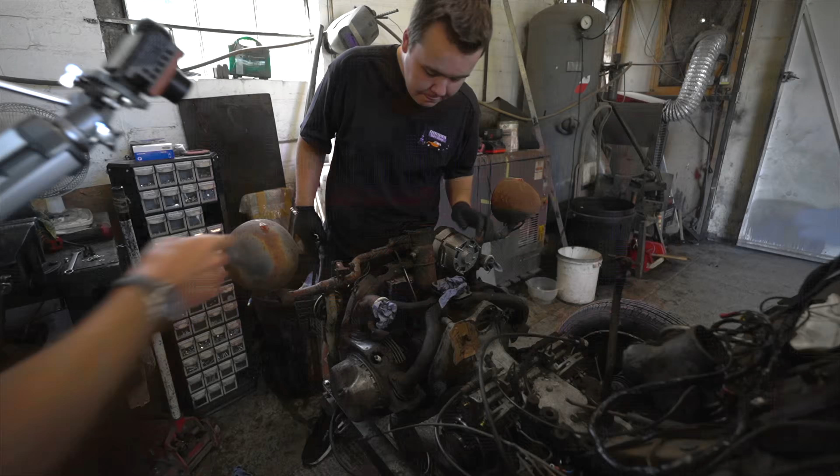No, I didn't realise how crucial the breather is on a 2CV. Apparently it's very, very crucial. So they often, you rebuild them? Yeah, what we do, you get a kit and basically we cut across this little seal here. It's like a clamp that holds the two pieces together.

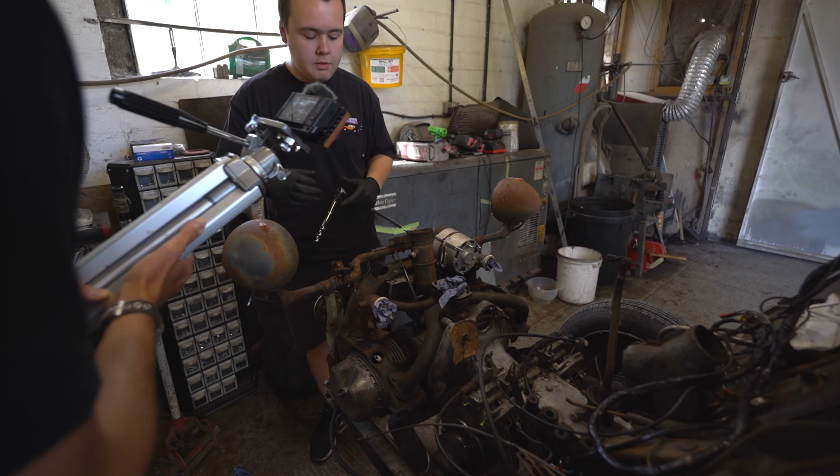Yeah. And inside there's a bunch of little rubber seals and a kind of one-way breather valve to let the pressure in the crankcase out and through this little hose, which then goes back through the airbox. Yeah. And I assume it gets reburned through the normal intake stream. But you have to cut it open, do you?

Yes, in the instructions it says you use this grinder and you cut away at this bit and then you cut around it and you pull and twist the two parts separately and then hopefully it should all come out fairly nice and see what the condition of it is like inside. He's rebuilding the 2CV oil breather.

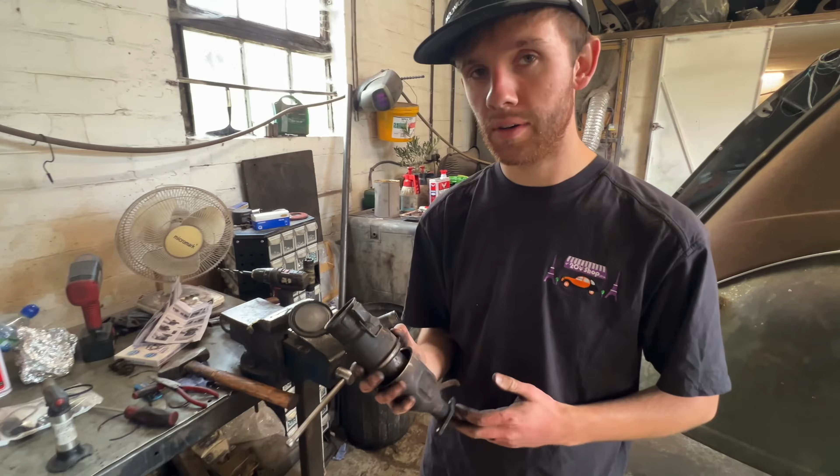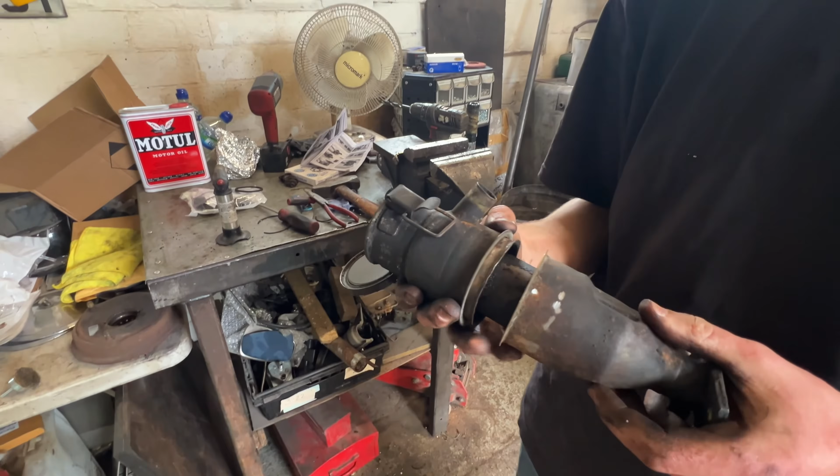So what have you been up to, Jen? Well, normally this has a lip on it that gets folded over the top, which holds it all together. But of course, you can't get them apart. So what you have to do is get a sander or an angle grinder, cut that lip off, and then that allows you to separate it all. And then strip it all down, take all these bits apart.

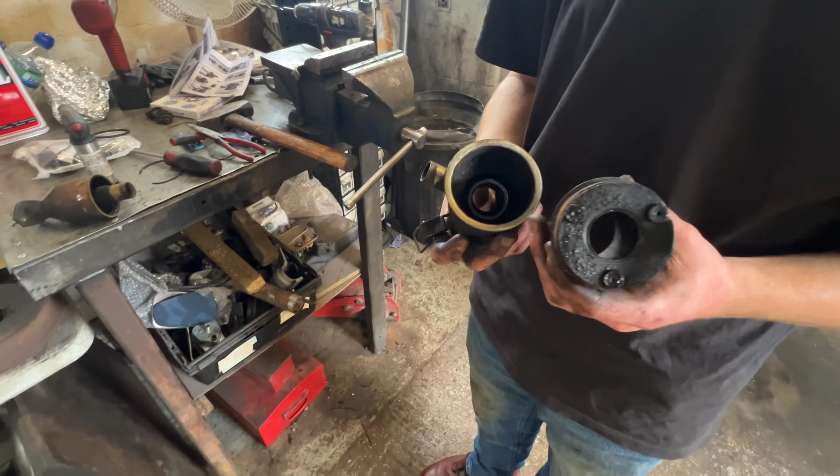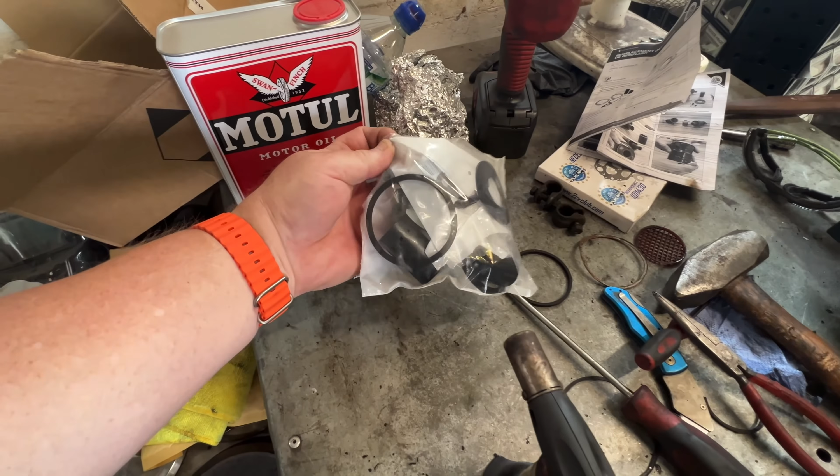And now we're ready to replace all the seals inside. Yep. And these are all the rubber kits to actually repair it so the engine will breathe.

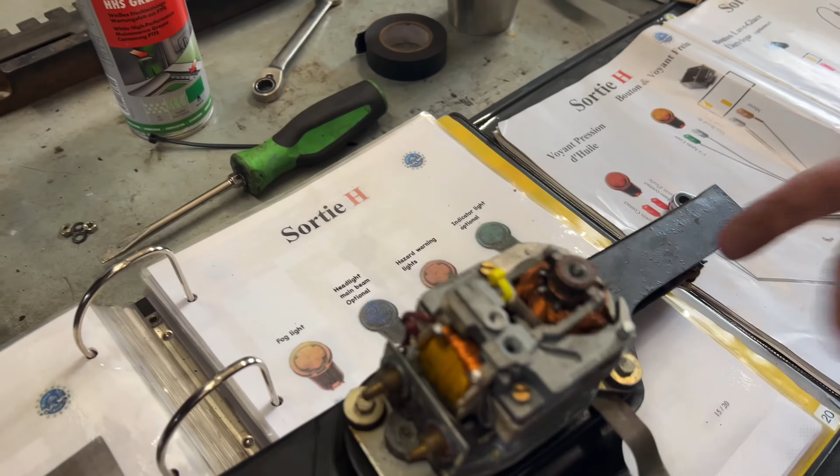So, Mr. Sattler, how are you getting on? That way. So cable tie on, and I've replicated the length of the original broken bit, so it's got the right tension. So absolutely perfect now. All fine. Perfection. Perfection in cable tie. I would only expect that from a maths teacher. So cover back on, done.

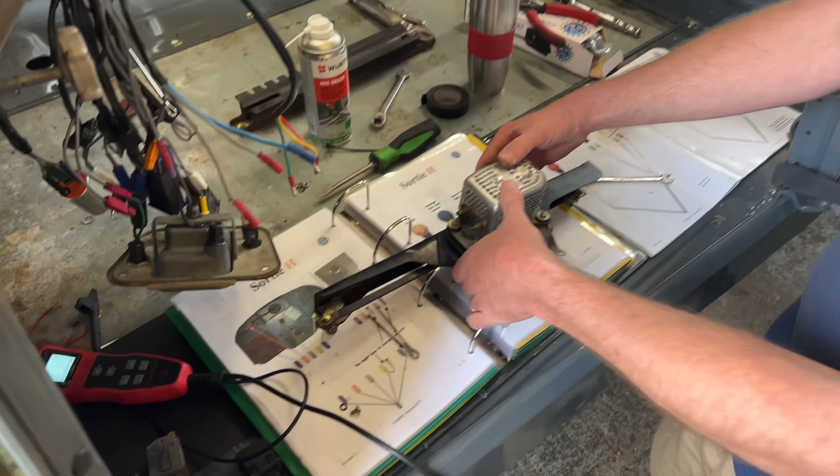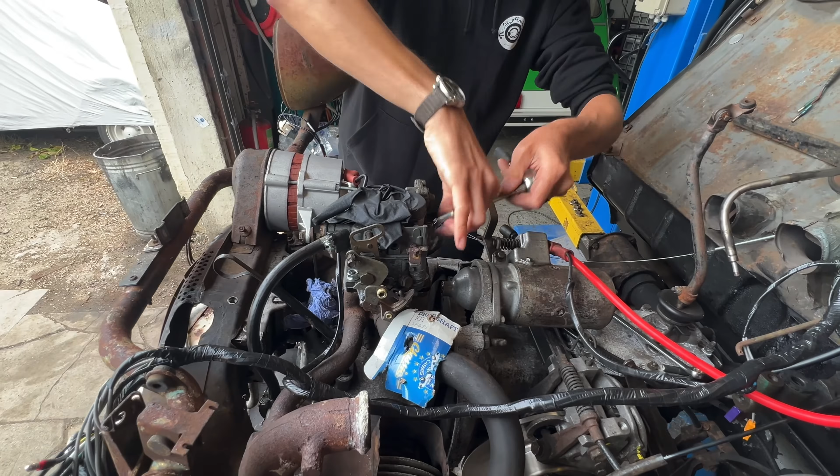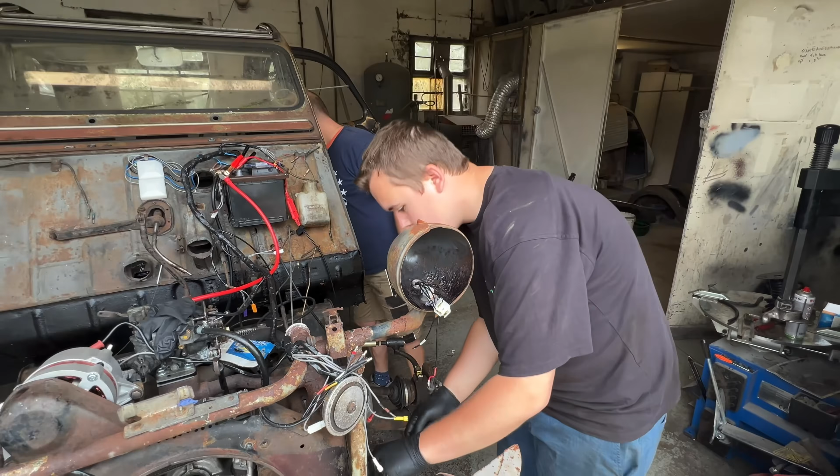So what's going on at the front? Jacob's doing a fuel pump. Mr. Smith is putting the bracket on for the accelerator cable. Yes. Yeah. Then we've got to put the coil on, electronic ignition, put headlights in. Richard's fixed a problem with the wiper motor.

That's going back in. So I think Mr. Smith's next job after doing that is putting the headlights in. So we get some lights. Yeah, refurbished headlights. Wire up these bad boys.

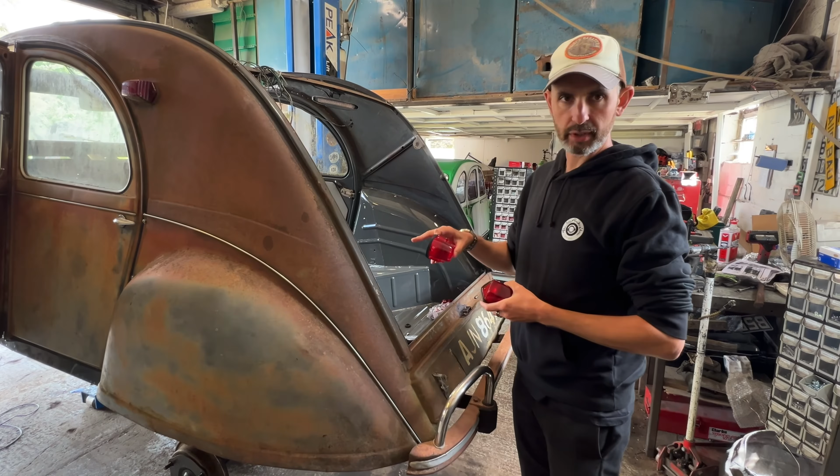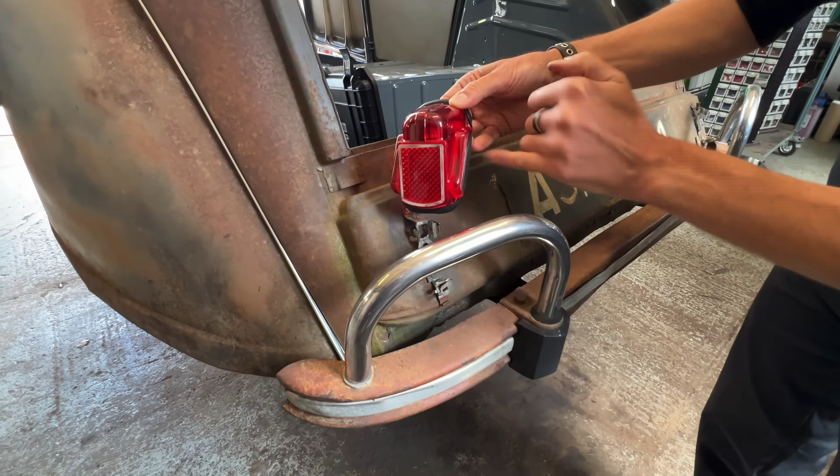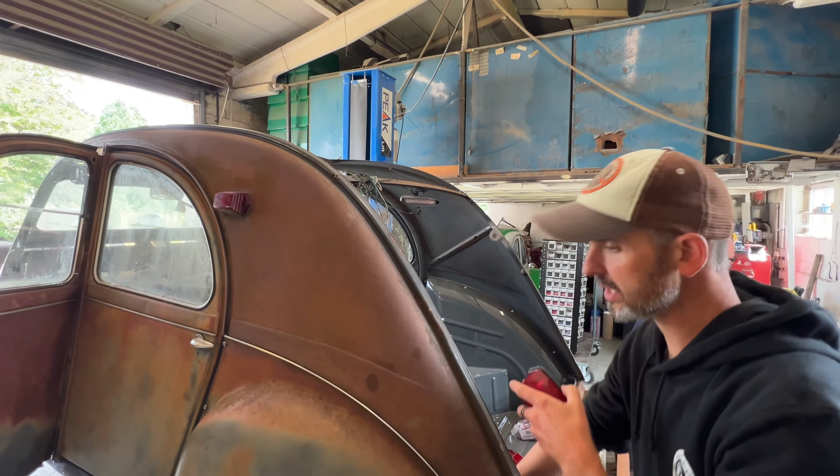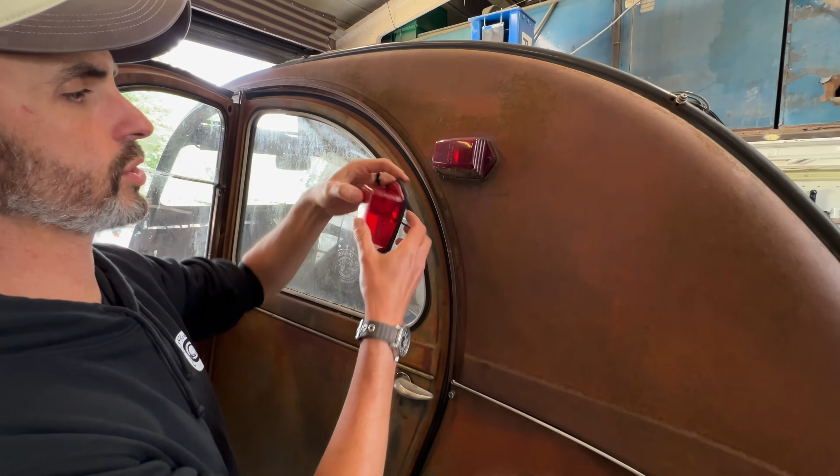So on this model of 2CV, you've got the quite small rear light clusters, but they are just rear lights. These are repro lenses, and the inside part that's clear acts as a number plate light shining in. So the indicators are up here, which is really cool. You can see this is one of the original units, but I think when I got the car, it was broken. It was missing the front portion. So Club Cassis do repros of these and of those taillights as well.

So I'm just going to take this off and have a look and see what the guts of this one are like. And I'll probably keep the other side, which isn't broken, as a spare. So we're going to have a look at that in case we keep the original guts or we go with the repro guts.

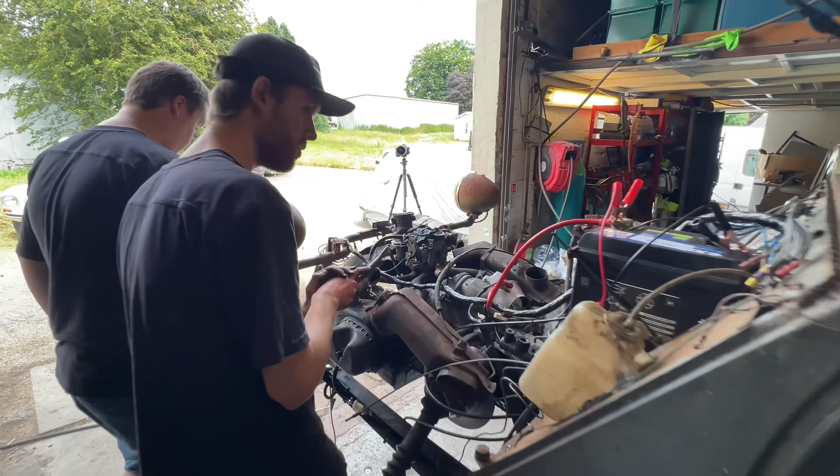Scrub them. Joe's on the exhaust. Yep, boom, boom. All the wiring looks a mess, but it's basically done for the front. We just do the wiring for the back.

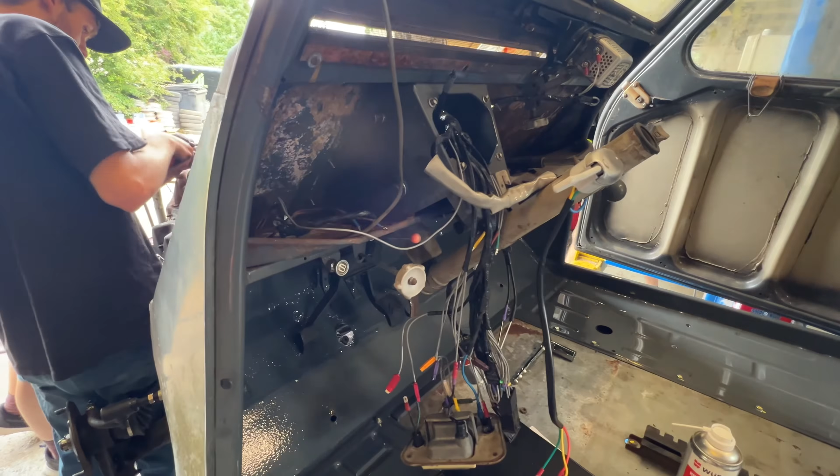Now the only downside to the indicators being up here is that modern motorists are not looking up here for indicators. So whereas we've added those extras on the front that someone had put the wiring in for at some point, we might put some aftermarket indicators down there somewhere. Some discreet little LEDs. This has also had a third brake light put on it. For that reason, people aren't expecting to see brake lights up here.

So actually, it doesn't look too bad. We'll pop it off and have a closer look. It doesn't look too bad, and I'll give it a clean up around there because obviously I'll get most of the loose algae and dried algae and stuff off like there.

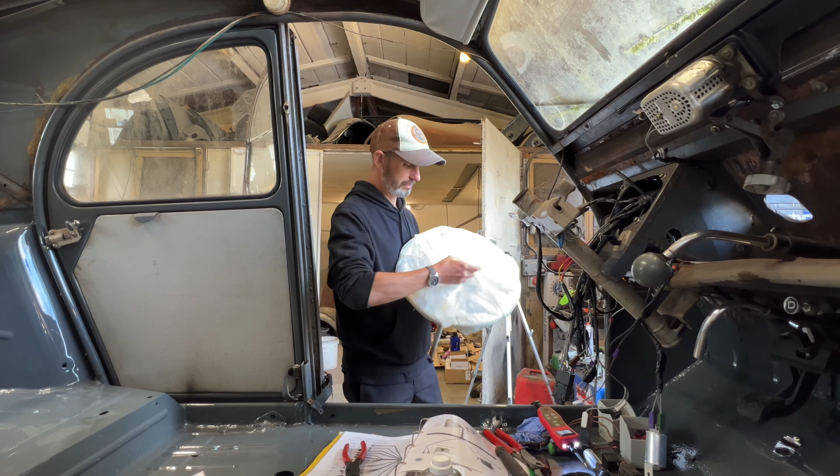It's actually time to put the steering wheel back on and reconnect the column. So we've been storing it very carefully because it's quite a rare wheel now. And I can't stand stuff getting damaged when it's off the car. I have the experience of that.

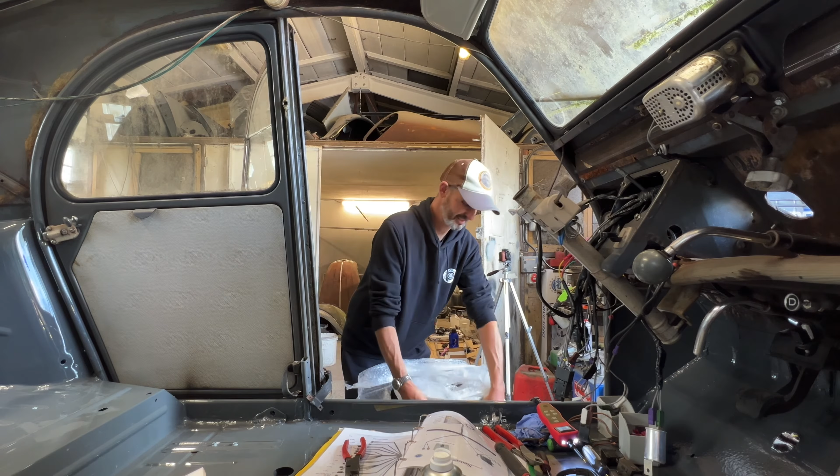So once we get that on, Jacob's done the tracking of the car, so the wheels are pretty much dead straight. So as long as we put the wheel on completely straight, it should be aligned. And then make sure the rubber is put in place there where the column goes through the floor, so you don't get water and mud coming in.

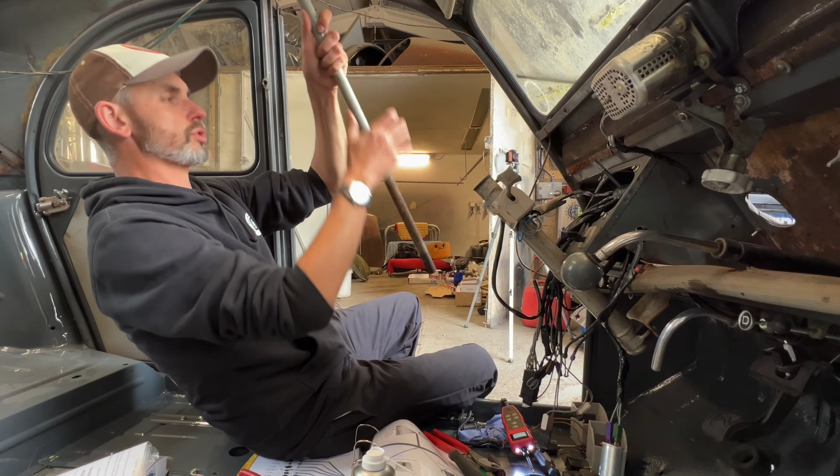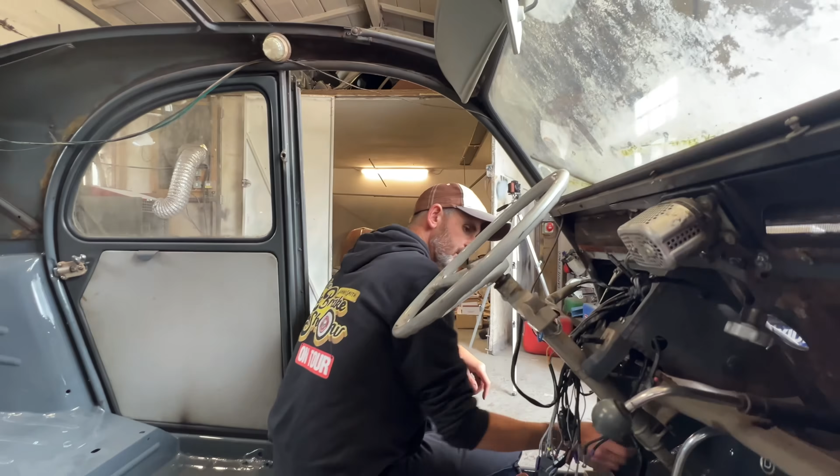Right, time to put the steering wheel in and make sure that the wheel is lined up. There's a rubber at the bottom where the column goes through the body onto the chassis. Pretty level from where I am. We'll get that grommet fitted properly once it's pinched up. So it's got like a clamp, like a pinch bolt, isn't it? Yeah.

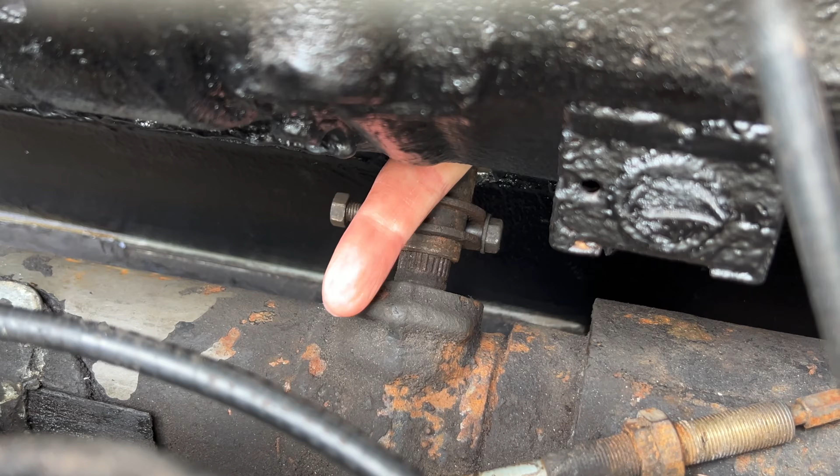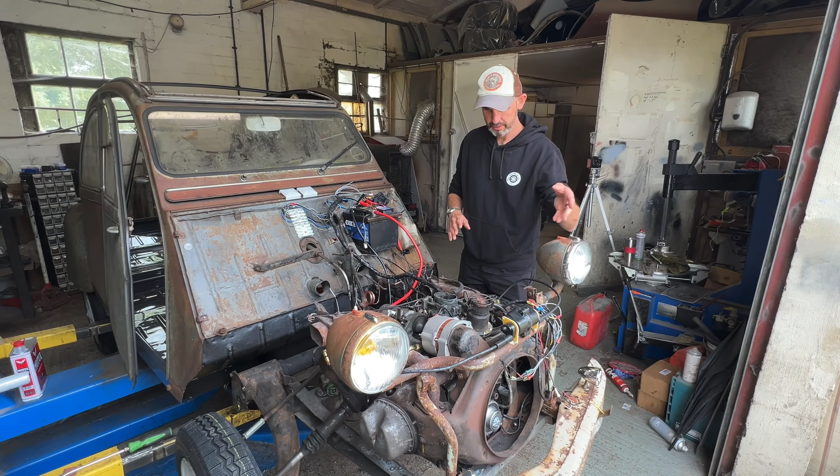You bloody muppet. So we think it's ready to fire up. Just a preliminary fire up. Air cleaner's not on it, fan belt's not on it, and the fan's not on it. But just to start it and check, we've primed the fuel system, put new petrol in it, ignition's on. Exhaust is on. So the ignition is on, the key is turned here. When I pull that back, there's no cables attached, and the throttle's not attached. I've got to do it manually.

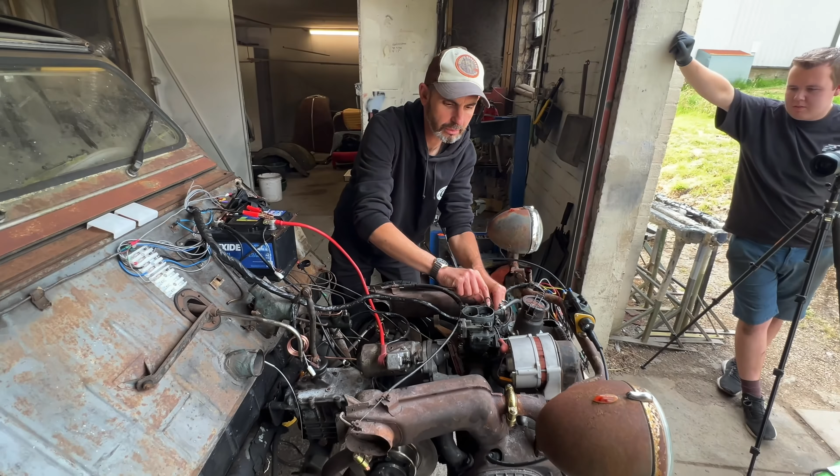I think it will go. He says. Just double check. Everyone ready? Yeah. Sounds alright, doesn't it? Yeah. Give it up. That's perfect.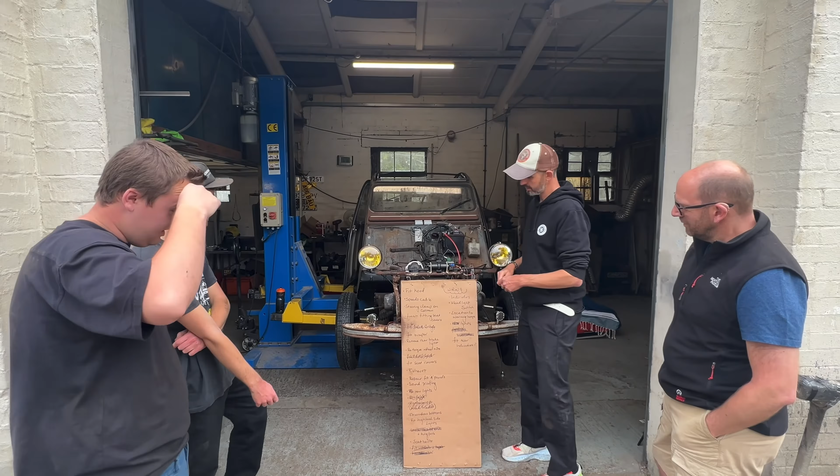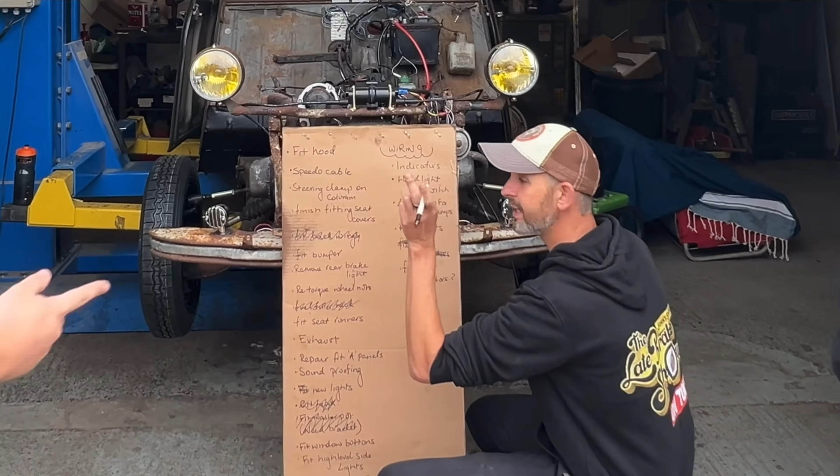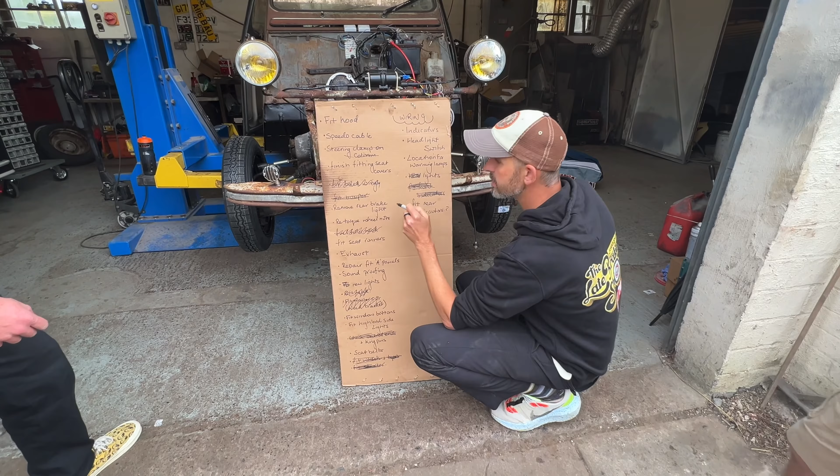Right, so: fit hood. No. Speedo cable. Gearbox end's in. Steering clamp on column. We did that, yeah. Finish fitting seat covers. No. Fit bumper. Yes. Remove rear brake light. No. Still there, I can see it. Retorque wheel nuts. No. Fit seat runners. Yes. Exhaust. Yes, you've done that.

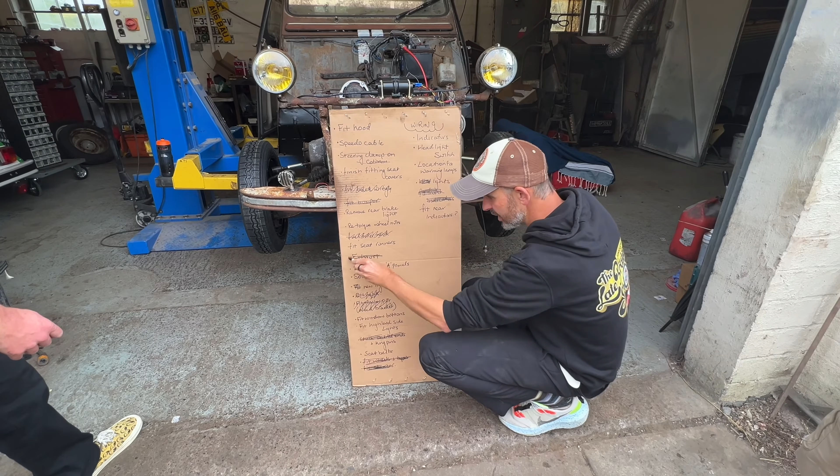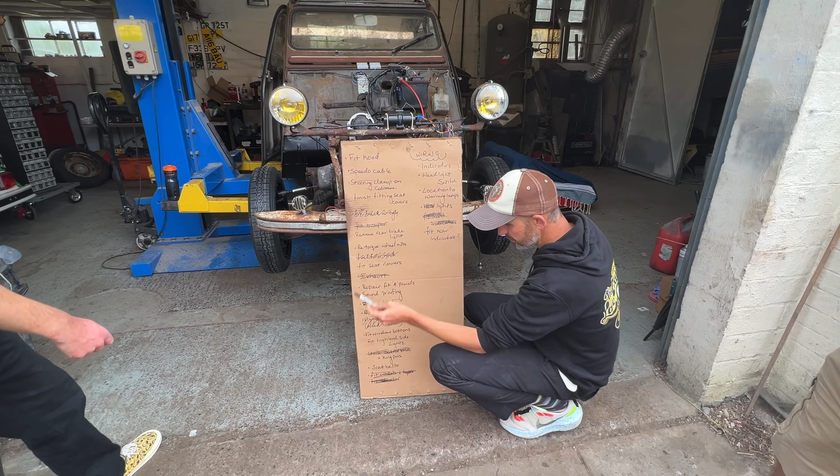Repair, fit A panels. No. Soundproofing. No. New lights. Yes. Tick. And the rear ones are pretty much there. Fit window buttons. No. The top catches. Fit high level side lights. Got the covers to go. I'll sort of go 50%. It's 50, I reckon. 50%.

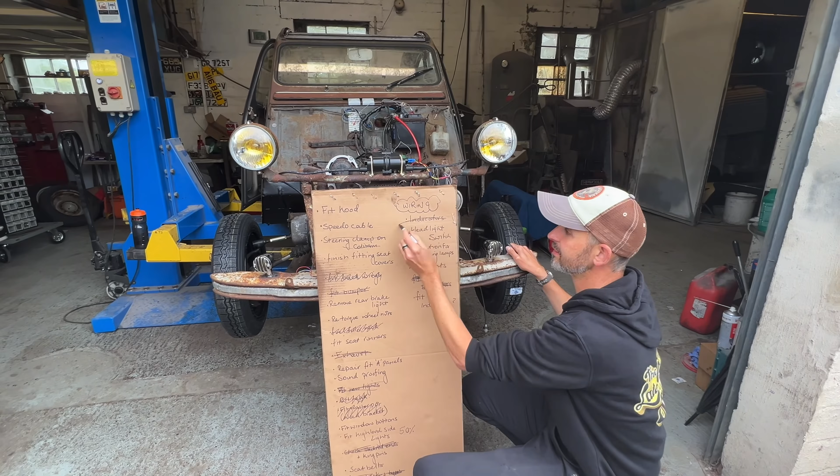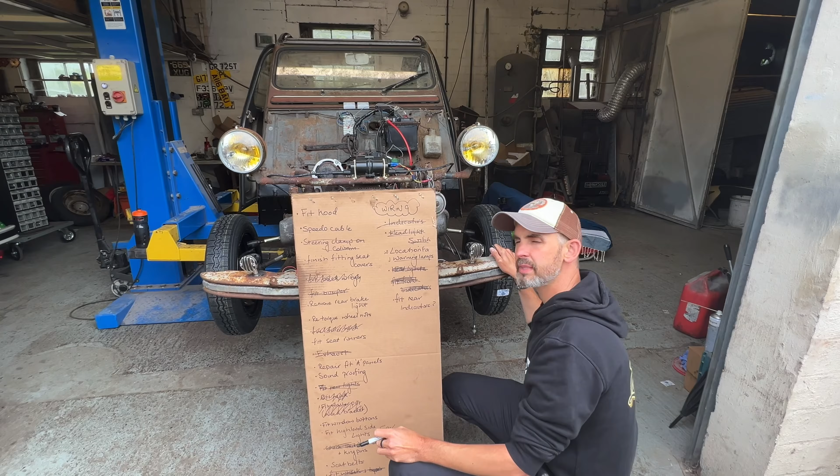Seatbelts, no. Now wiring is something that we've done a lot of this weekend. It doesn't look it, but we've done a lot of critical stuff. So indicators, yes. Headlight switch, yes. Location for. We have found the warning lights work, but we haven't got the location bit. So cross by that, tick by that. Lights, yes. Fit rear indicators. Well, they're high up. Maybe another 50%.

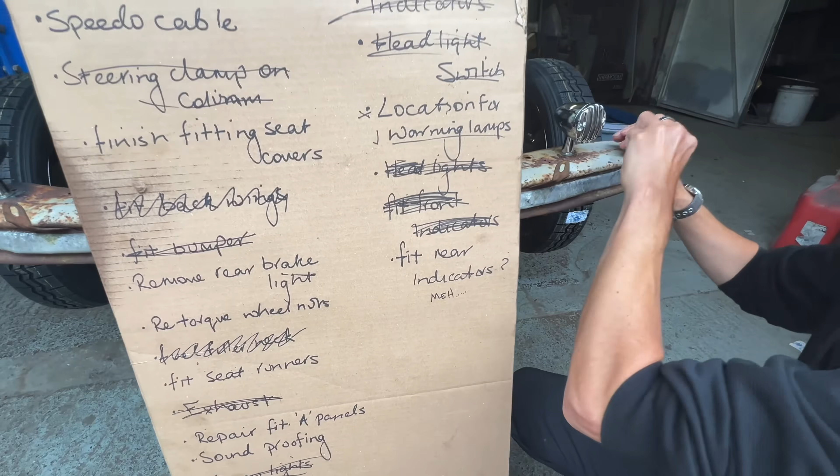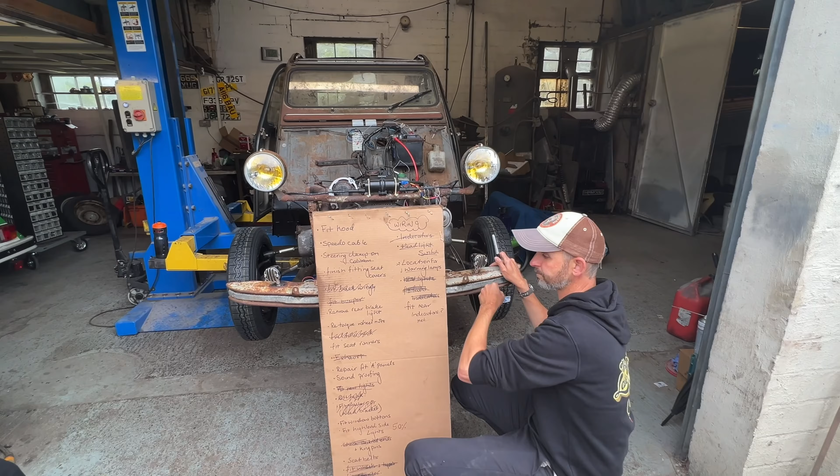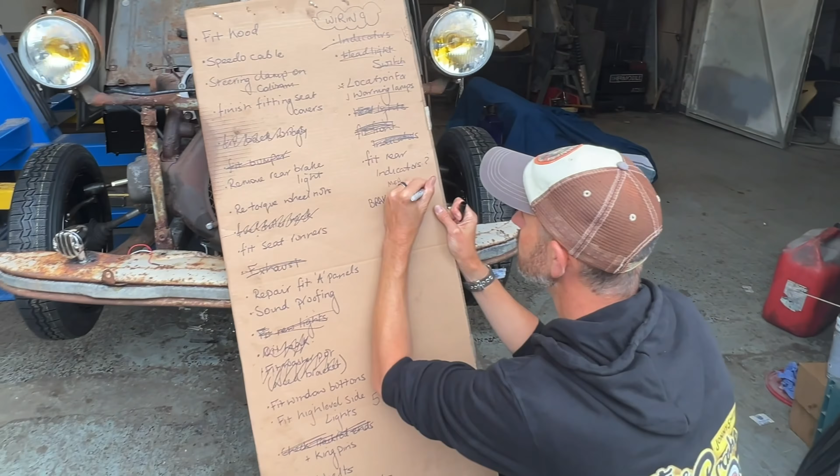Okay. I call that a win. Well, there are other things that we haven't written on here that we've done. New fan belt, fan back on, for example. I think you should write it on, then cross it off. That's a good idea. Brakes. We have brakes. Clutch working. Cross that off. Fan and belt. Oil breather. You've rebuilt the oil breather. It took you about an hour and a half, which is probably quite fast actually. Jordan, it took him an hour and a half the first time he did it.

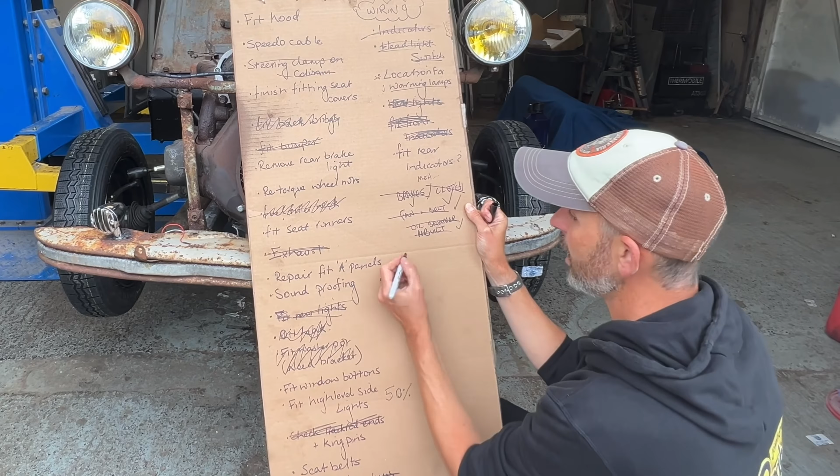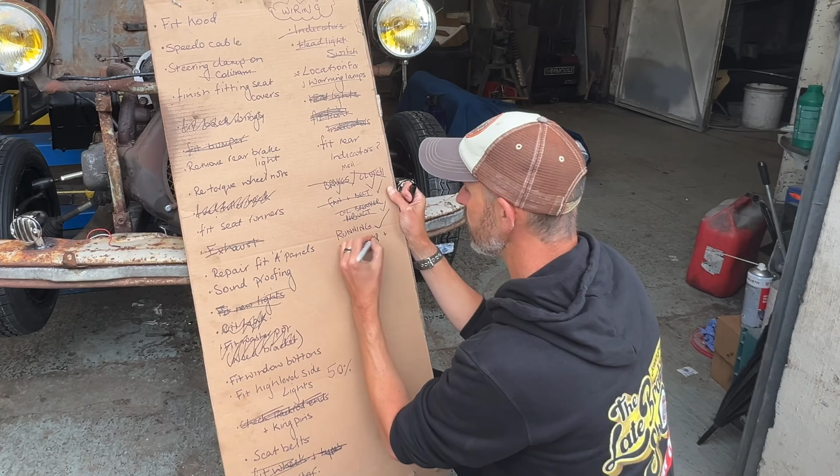Anything else we can congratulate ourselves on? Got it running, just generally. Fuel system running. Alternator. You put a new fuel pump on, and lines. Clutch cable. It's like retrospectively planning. This is self-congratulation. Look, I spent 2 days of my life doing this. There's not much to show at the moment. Fit carburetor. That was yesterday. Tracking. Okay, yeah.

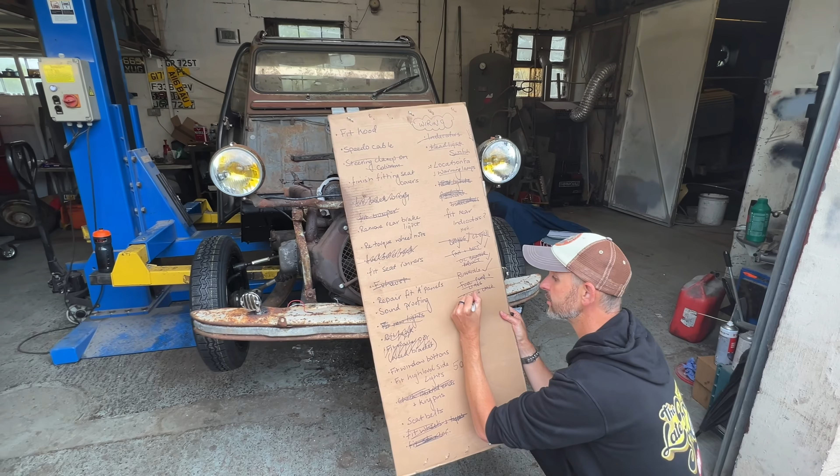Cuddly toy, microwave. Oh no, that's the wrong game.

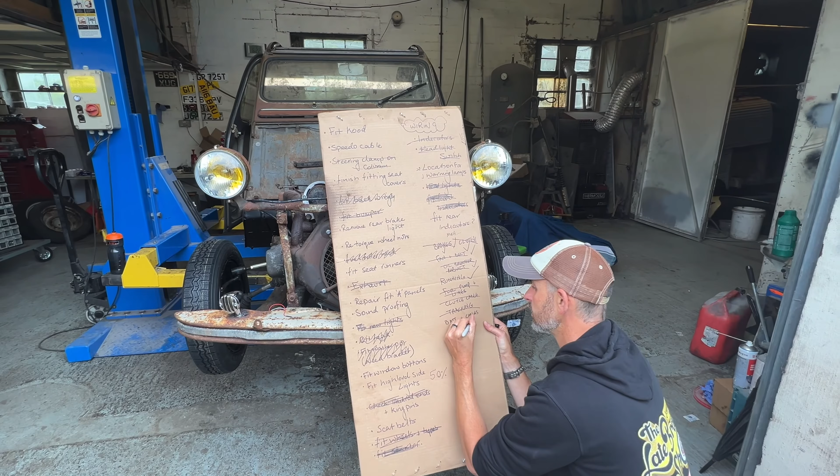Done. I replaced the fuse. Heat exchangers. Battery and cables. Fuse box. Starter went in. Good job of that. Feels strange writing things in and then crossing them off straight away, but look how much better our list looks now. It looks massive. So yeah, we're doing all right.

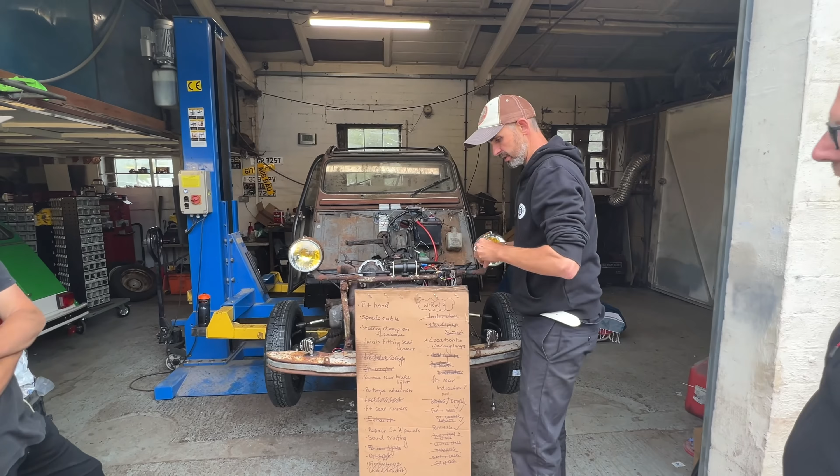I think all the things that we've done today are things that are vital, but visually not particularly interesting. That's the take from this evening. But I'm making sure the wiring is done to a high standard and routed nicely, and all those little things like fuel lines. They're not visually interesting. That's really good, and it started beautifully. Smooth. Solid progress, as displayed by this piece of cardboard.

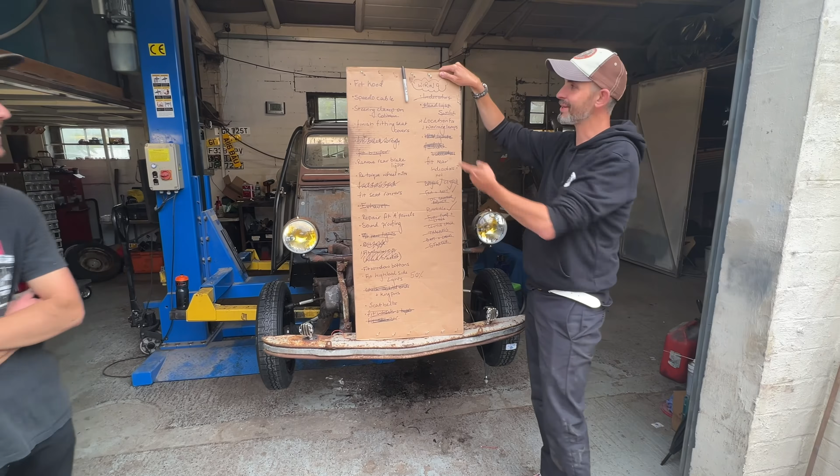That's how all the professionals do it. Like in Formula One, they have this at the back of their wheels, Williams written across the top. When Lewis Hamilton's going by at 100, they hold it out: come in. They've got Ron Dennis there with a Sharpie. Come in, write it bigger. Cardboard's lighter than plastic, so Ron will like it. Quite.